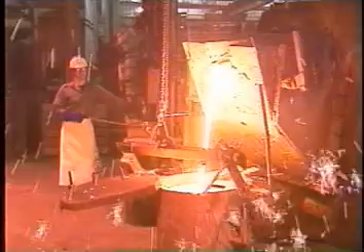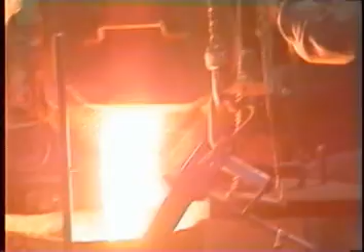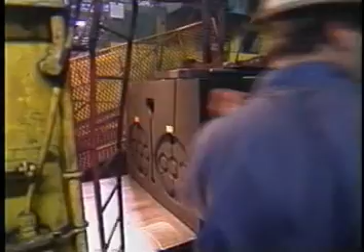Since 1921, Bibby-Ste-Croix Foundry has achieved an expertise that is recognized throughout North America. It is a company known for listening to its customers, for following the needs of the market, and for coming up with innovative products, many of which have set new standards in the industry.

Laperle Foundry, which becomes a division of Bibby-Ste-Croix in 1985, introduces a new product on the market in 1981, a product that revolutionizes street castings. It is called the auto-stable or self-level. The self-level was developed by a British company, Self-Lock. It's a product that instantly won over the Laperle Foundry directors. It applies the perfect principle for dealing with the well-known problems of conventional castings.

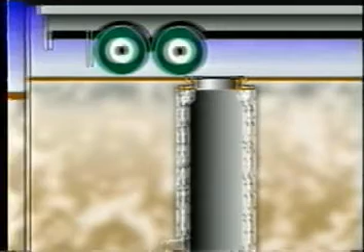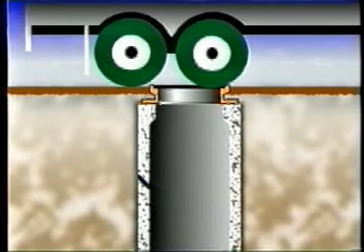Here it is, an urban nightmare for motorists and municipal administrators that can entail exorbitant costs. With a conventional installation, the standard frame sits directly on the manhole's concrete structure. The weight of heavy vehicles creates intense pressure on the frame itself, which in turn transfers the pressure to the entire adjacent structure. With time, the strain seriously damages the structure and the assembly joints until finally it can begin to sink.

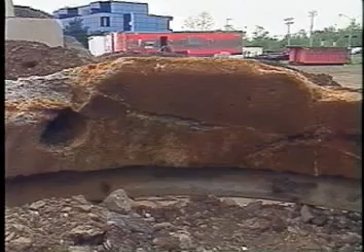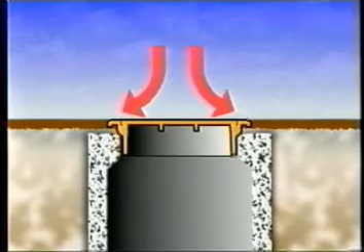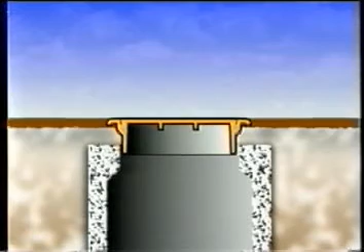But with Laperle Foundry's auto-stable, the weight of traffic is distributed horizontally at the road surface and is not transmitted to the structure beneath. Until just recently, the only way to install the auto-stable was to insert it inside a concrete headring. Thanks to this unique design, the auto-stable becomes an integral part of the road, responding with the changes in level caused by traffic and the freezing and thawing of the ground. Some cities throughout Canada have been using this system for more than 10 years.

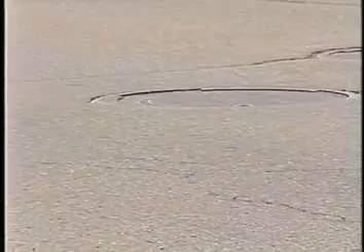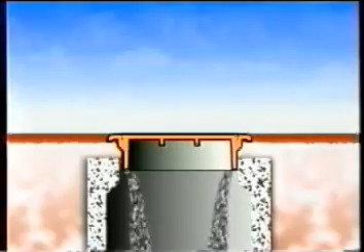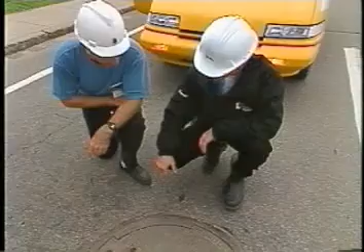But the fitting of the auto-stable can create an insupportable pressure around it that can lead to backfill infiltration and ground erosion surrounding the frame. The Laperle Foundry's engineers, technicians, and representatives attacked the problem, and since 1981, with the help of others in the industry, they've come up with significant improvements to the auto-stable.

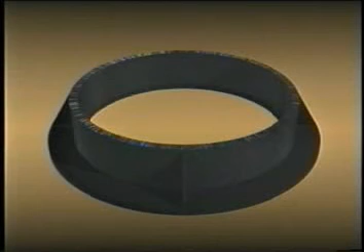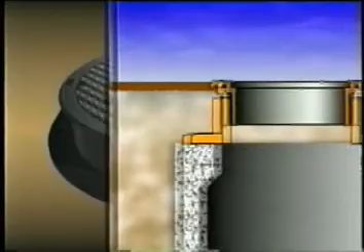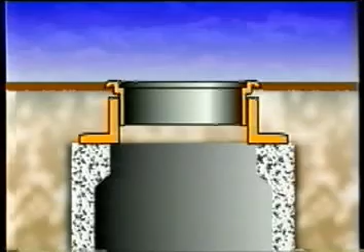They began with creating a gray cast iron outer guide frame, a component that greatly increases the auto-stable's effectiveness. This is placed on the standard concrete head, and the frame is inserted inside the guide frame. That's why the auto-stable can slide precisely without shifting laterally. As well, the outer guide frame allows a greater vertical adjustment and also limits infiltration around the auto-stable frame.

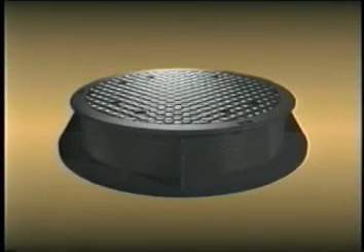Just recently, Laperle engineers made another improvement, a totally innovative cone-shaped guide frame, which gives the whole manhole structure even more stability and flexibility. This innovation will greatly simplify the installation of a manhole on a hill.

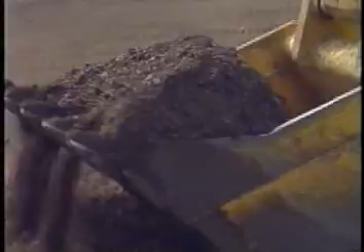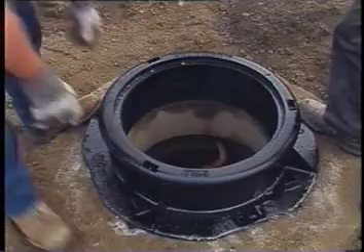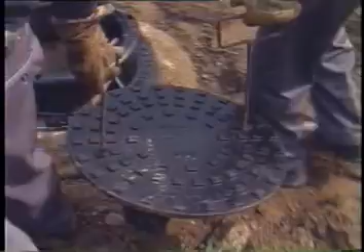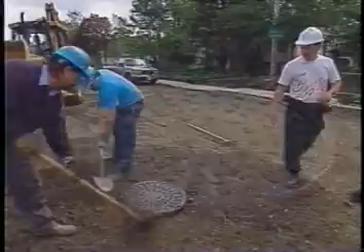The outer guide frame is installed in exactly the same way as a conventional frame. Then the auto-stable frame is inserted inside the outer guide frame. The cover is then placed on its base. The outer guide frame must be filled and well compacted with gravel to about 1 inch from the rim, or according to specifications.

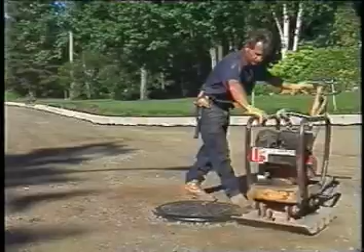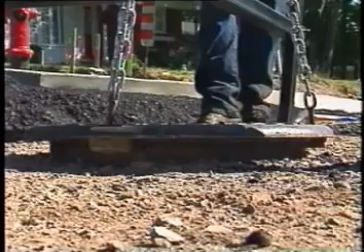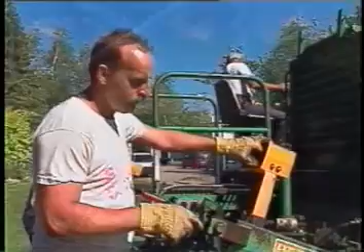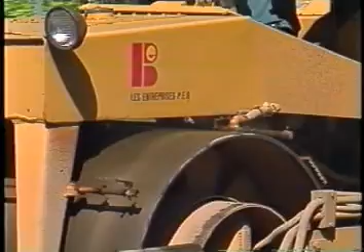Once the compacting is finished, all that's left is to tilt the auto-stable frame with asphalt so that it meets the slope of the street. To finish, the auto-stable frame is pressed into the asphalt. That's how the frame becomes an integral part of the road surface, moving with it.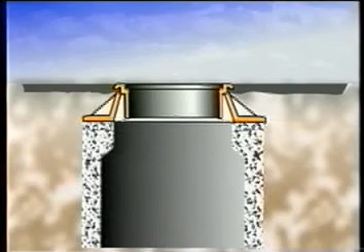During resurfacing, the frame must be removed from the asphalt surface. It's important to be sure that there's no asphalt residue stuck under the edge or around the sliding section. Finally, asphalt must be put under the frame and then passed over with a steamroller.

Over the years, with all these improvements, the auto-stable has become an extremely worthwhile product for cities trying to reduce repair costs. The cost savings achieved on installation as well as maintenance are immediately obvious.

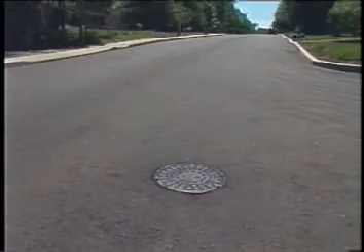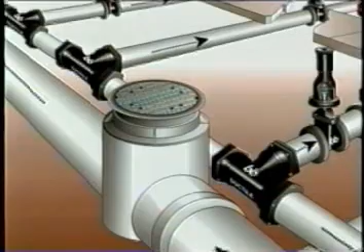Here are the particular technical principles that make the auto-stable a product that is used and appreciated more and more in the industry: lightness, silence, stability, flexibility, ease of installation thanks to manhole level lifting keys, little damage to the concrete structure, ease of height adjustment, allows more adjustment with asphalt, minimizes erosion, has an edge that prevents plow damage, now simpler to adjust on a hill. The auto-stable is available in several diameters for both manholes and some types of catch basins.

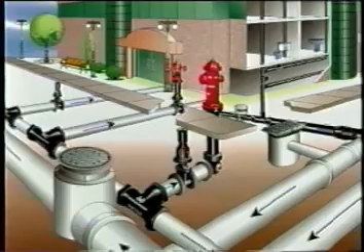Since 1921, Bibby-Ste-Croix has never lost sight of its objective: to be at the forefront of its industry, producing excellent and diverse products that are exported all over North America. And it is in this spirit that Laperle Foundry Division forges ahead.